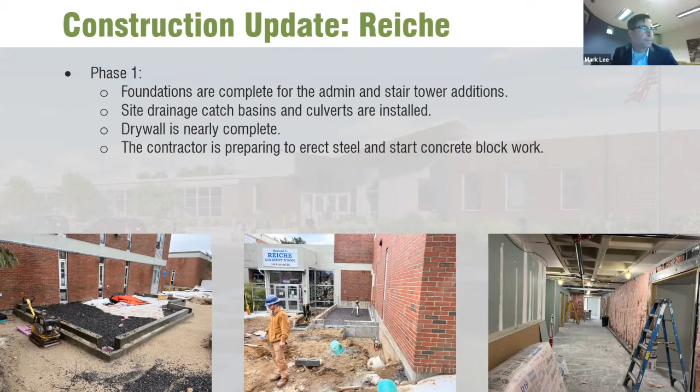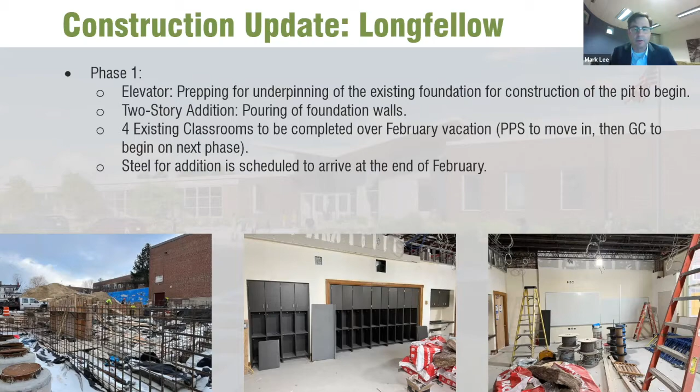And I'm sorry, were those also in the two other projects? I don't remember if the steel piece specifically is an issue. Yeah, that was identified. I'll kind of go back so you can see that right now the contractor is preparing to erect the steel and start the concrete block work, so we're at the same place. The stair tower on this one is built out of concrete block units, not steel, but the addition in the front is built out of steel framing. And on this one, as soon as - it says that very last item, that the steel for the addition is scheduled to arrive at the end of February here. Okay, great, thank you.

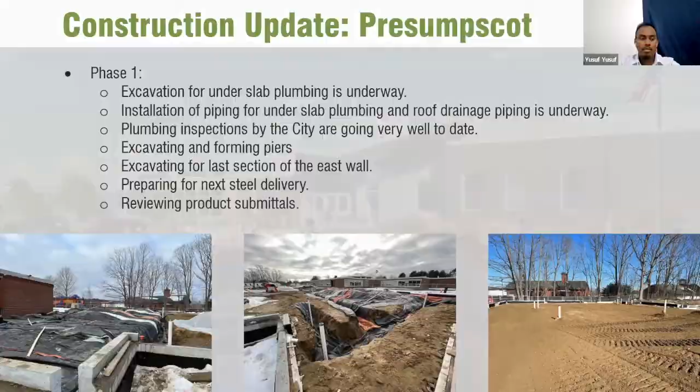So the next thing is an update on where we are with respect to the project impacts. We brought forward some of this information last meeting, and we've got a few updates. The first is the new work cost, and a lot of it is associated with the permitting process we went through, and the new work that resulted from feedback from the city and what they were asking for the project.

At Longfellow, a lot of it was right around the bathrooms. Reiche had to do with some of the bathrooms and the 2-story space at the library, center of the school. And Presumpscot had to do with the energy code upgrades.

So right now, the first column you see on the pricing side is the initial claim, which is what the contractor supplied for their cost for that new work. The process of review by CHA, Harriman, and the owner is to vet that out, making sure we're receiving a fair price and that we understand the same quantities and amount of time for the work to be done and the cost for that.

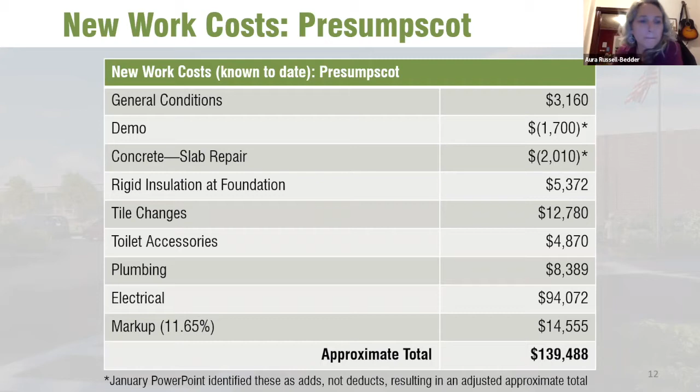I don't think the plumbing did. The 94,000 was the big lion's share of this, and that was, as we discussed, a lot of the circuiting we had to do for that. Okay, I think I was just remembering some small amount about plumbing that we weren't expecting, but it sounds like there wasn't a change from our last meeting about the plumbing piece. Thank you, Board Member Aura Russell-Bedder.

Councillor April Fournier, go ahead please. Thank you so much, this is great, and I think it helps ground where everything's at. I'm just curious about the tile changes. Is that truly just tile changes, like I wanted blue and we were out of blue, so now we have to go with brown?

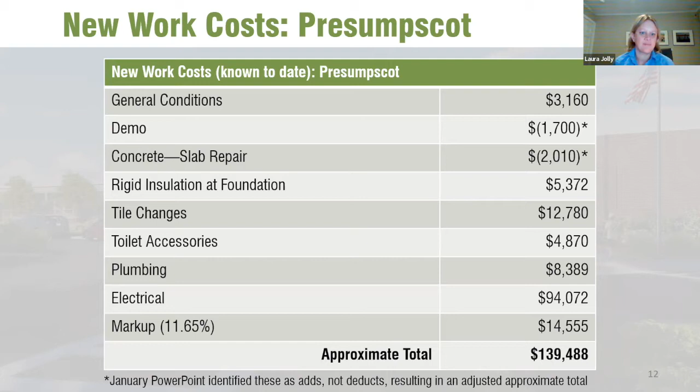Yeah, April, I'll have to dig into specifically what that tile change referred to, unless Laura knows off the top of her head. Yeah, I can tell you. Because we made plumbing changes on the project, that affected the tile in the bathroom. So it wasn't a matter of picking a different color. It was a combination of reducing the amount of tile and adding more tile. Great, thank you. Thank you, Councillor April.

Councillor Mark Dion, go ahead please. Mark, it's a question for you and your team. I just want to tease out this idea of the markups. Is there a way we can distinguish and allocate those costs as between product and labor? I mean, is that possible?

Yeah, they did provide us that backup. Part of their backup shows exactly what the cost for the construction materials and labor are, and then they show us the breakout of the markup. So that markup of 11.65% is based on the subtotal provided on the materials and the labor. Does that answer that, Mark?

Well, I get that, but I think if I was in another forum and had to explain the increase in cost, it would be helpful - simplistic, but say a $250,000 or $500,000 increase in construction costs - to know 40% of that had to do with labor and whatever drove that labor cost upwards, whether it was the delay or other types of issues, and 60% with natural inflation in accessing the product. Because when I look at $139,000, I don't know if that's from tiles or the technicians that actually install the tile. What's the proportion?

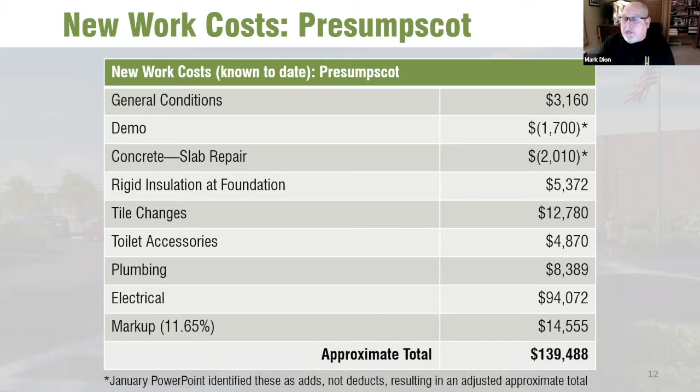Well, that'd be helpful. I don't know if it's helpful to the other members of the committee, but it helps me assess what a markup truly represents. So if you can do that with your team, Mark, I would appreciate it. Sure, yeah, we can show you how the contractor arrives at those values.

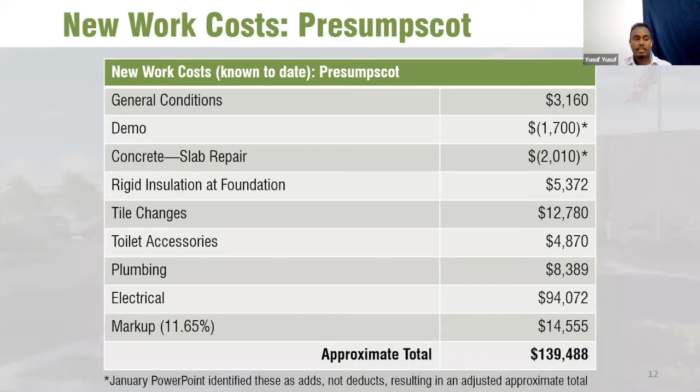Thank you, Member Paul. Any other questions for Mark? I think I see none. Go ahead, please.

This, again, I don't believe has changed substantially from our last update, which is that Longfellow right now is looking at a 4-month delay, to our knowledge at this point. So what that does is push the completion out to December of 2023.

And then there's some work that will have to happen in the summer of 2024, so that will wait until the better weather.

For Reiche, I'm not sure if we had some sense of that duration last time, because that's been the one we've been working on the most to try to nail down and work with them on the schedule. But we're looking at about a 4-month delay on the Reiche project, which pushes it to December 2023 completion, similar to Longfellow. And Presumpscot is about a 5-month delay that pushes out till January 11th.

We actually have a new adjusted completion date, and that kind of frames part of the conversation with the contractors regarding how much longer it's going to take and how much additional cost it's going to take them because of that delay. Any questions?